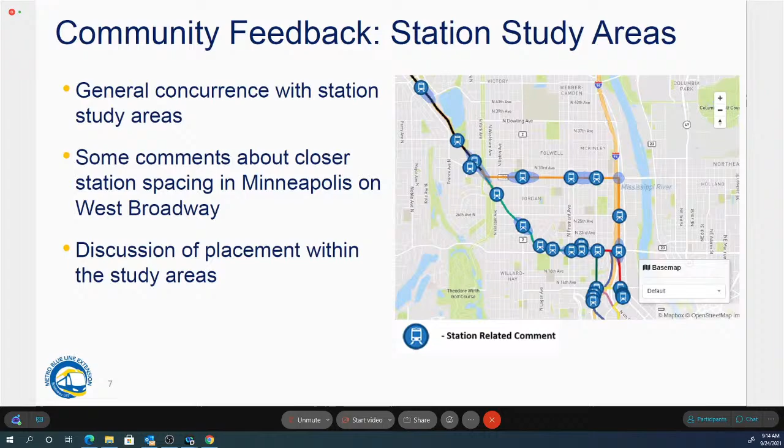Regarding the visualizations, it's a little bit different in each community. For our Brooklyn Park folks, their visualizations have been around for quite some time, so it was just kind of going back.

Why did you make some of these decisions? How did this park and ride get placed here and not another place? How did you come up with this site design? Let's walk through it and really get into those details.

And a lot of the other places like Crystal, we heard a lot about pedestrian connections and safety. That's something we've been talking about for a long time, and the designers are definitely keyed into that as we move forward in the process.

In Robbinsdale, pedestrian safety, a lot of questions about traffic flow and how the LRT and the road work together. You see the visualizations of how that could look. Community cohesion, connections into downtown. And again, we heard it from almost day one when we started at Project 2.0, but just the connection to North Memorial Hospital, the importance of that, and potentially park and ride options.

For Minneapolis, the visualizations, I would say, spurred even more questions to get into details. So how do the turn lanes work? How do you place these stations? How does it all really fit together?

For Lowry, there's bike accommodations. So how would that, kind of what we're showing, how does that really work? Let's get into those details. Pedestrian crossings, especially maybe at unsignalized intersections, and how that would work.

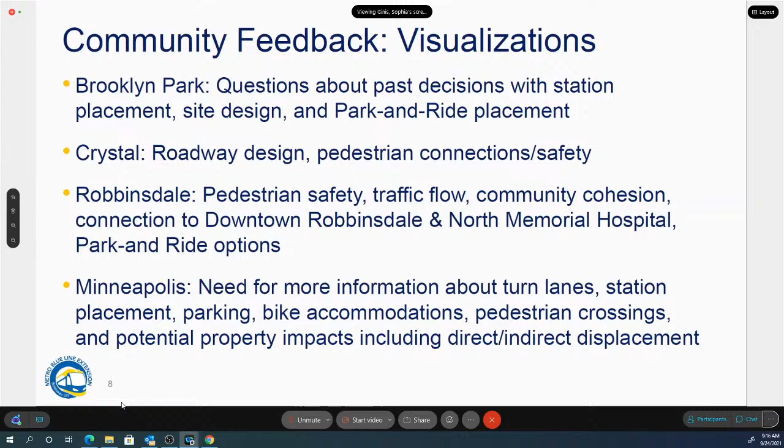So that's a small summary of what we've heard. There's obviously a lot more detail within that, but at least that hopefully gives you a flavor of some of the themes and reactions that we've received.

Well, thanks so much, Sophia. 2,000 conversations, you've been really getting a lot of feedback, and I know it's really important that we have full consideration of residents, businesses. This is quite a puzzle that you have been hearing about.

Any questions for Sophia? What we've heard. Yeah, I have a question. This is Nicole Bueller from the Blue Line Coalition.

Sure, go ahead, Nicole. So I guess maybe it's more of a comment, but I would just add that a lot of what we've been hearing, and I'm a member of the community engagement cohort, and what I've been hearing there is that when people are out, having these conversations about route selection, Lowry or West Broadway for example, it's really difficult for community members to make that decision without knowing what the impacts would be potentially for displacement, either direct or indirect, on either Lowry or West Broadway. So without having that information in front of them, it's difficult for them to say, okay, we'd prefer West Broadway or we'd prefer Lowry. So I guess there's my comment.

My question is, is there going to be an attempt to be able to show that to the community before expecting folks to select a route? Chair, would you like me to answer?

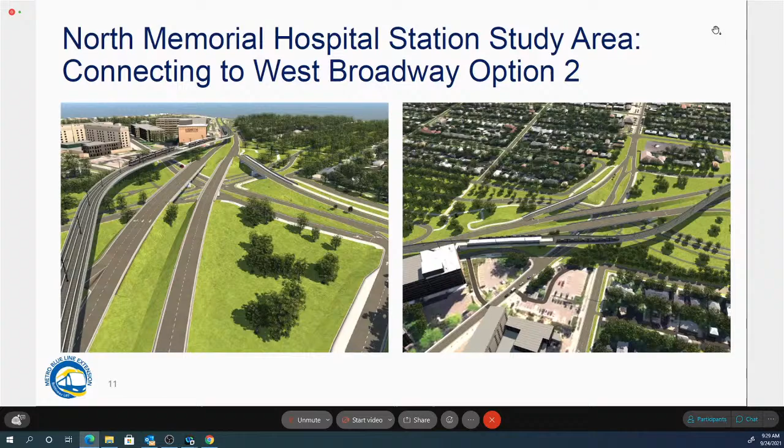We're going to move on to the next one, and this is a connection from Lowry and how a connection from Lowry would work.

So this is coming on the left-hand side. This is Lowry, looking east. This is Lowry coming westbound on a structure, and we start coming up over in grade and connect back to

a center running configuration on 81. As you look at the left-hand side, that gives us more of that north-looking view again as we're looking up West Broadway. You can see how a bridge structure comes up from Lowry, sweeps around into a center running configuration on County Road 81 and connects to North Memorial Hospital.

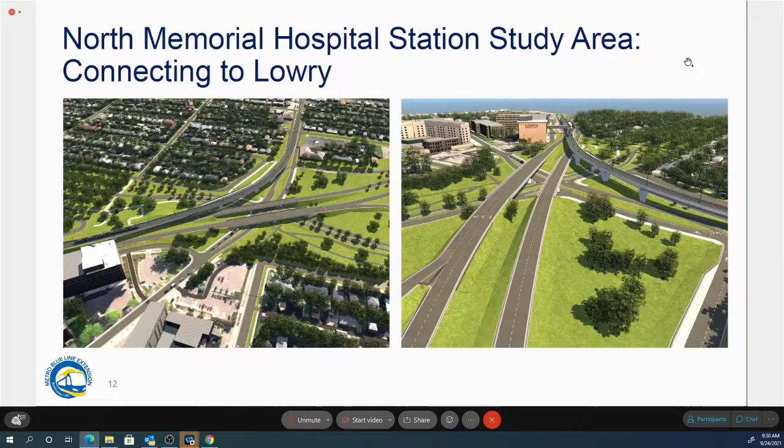So I'm going to move forward here. We're going to look at a couple of videos that we have. So go back.

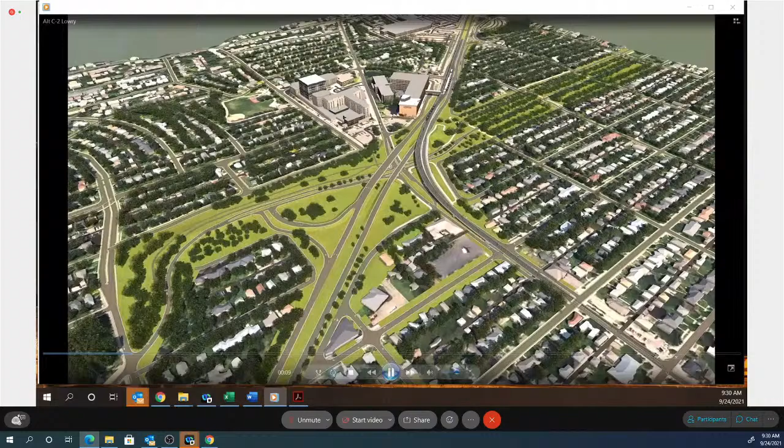So we'll look at this first video here, and this is the Lowry configuration, and it'll give us a 360 of how it looks. So we're starting off up above, looking to the north, and we'll swing around through this and see how it works.

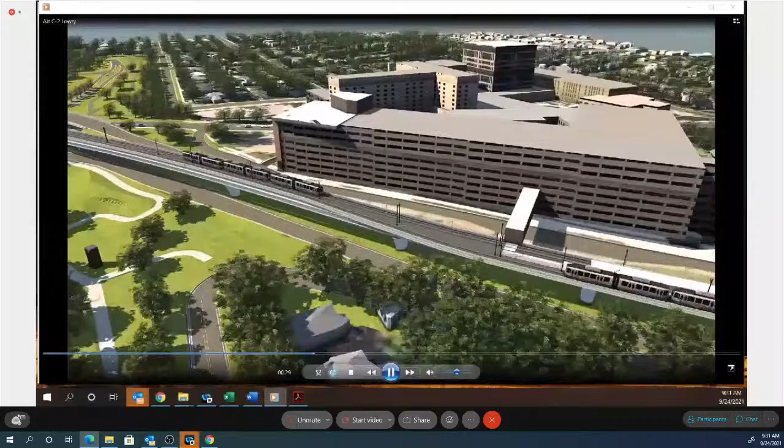So coming up from a center running at grade on Lowry, building up to a structure that kind of mirrors the ramp from Lowry onto County Road 81. You can see how the train fits here, where a station would be located. The station, again, because of the grades, pushes more towards that Abbott Avenue area, having a connection to Abbott Avenue and a potential connection to the hospital parking lot, parking ramp.

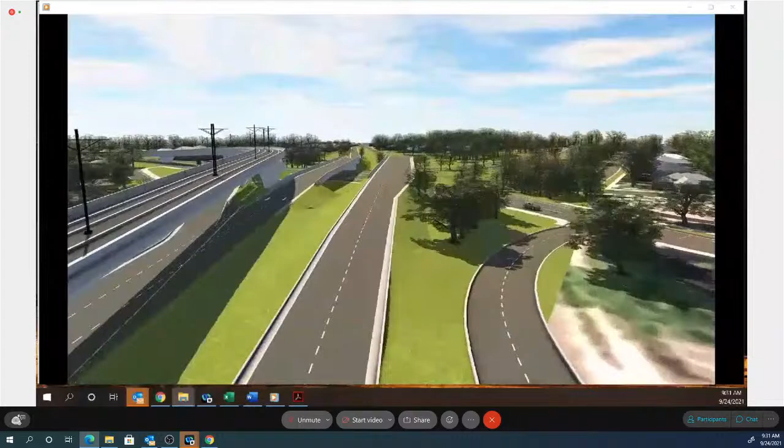And these videos are really, they look fairly detailed, but they are based on a very minimal amount of engineering. We're probably less than 5% engineering right now. So if you start looking too closely there's a lot of details that are maybe not shown, but this is more of an idea of how things can fit and what the massing is of it and how it would work.

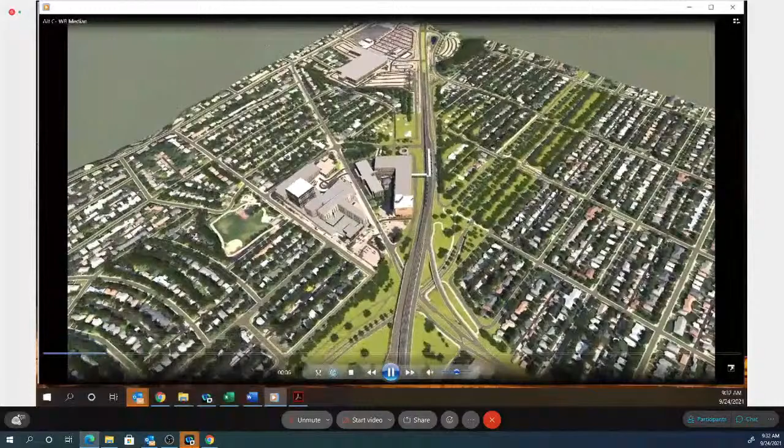So the next video that we're bringing up here is that first option of West Broadway going north onto County Road 81. This stays center running here and goes between the two bridges that are under construction for County Road 81, or the West Broadway over Lowry.

So again, this is one of those locations where the height of that bridge and needing to have a flat space for a station, as we're trying to catch grades, it really pushes the station back down towards Abbott Avenue. So that's why we're showing it in this location. We're trying to get an area that's a tangent, meaning straight, so we can get a station in there, and fairly flat for that station, so we're not on a slope.

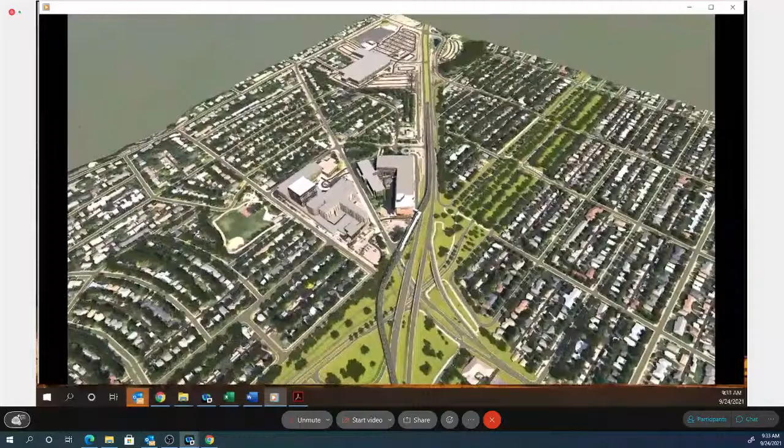And then after this, we'll have one more video of option 2 for coming from West Broadway. This is more of a swoop where we go again over that southbound lane and get maybe a bit closer connection to the hospital, but it allows us to move that station a little bit more to the south configuration, so there's a better connection maybe to the trails, the park board, Oakdale, and the neighborhoods around it, and has a connection to that hospital a little bit farther to the south in their campus, and may have a potential for a better connection to both sides of their campus.

So these are the three videos and the concepts. Chair, if there are any questions on this, if not, we can move on to look at Crystal and some of the work we're doing there. Any questions at this point?

And Nick, great visuals. I fortunately am pretty good at not getting sick when I fly in an airplane, but that gives you that real kind of movement there.

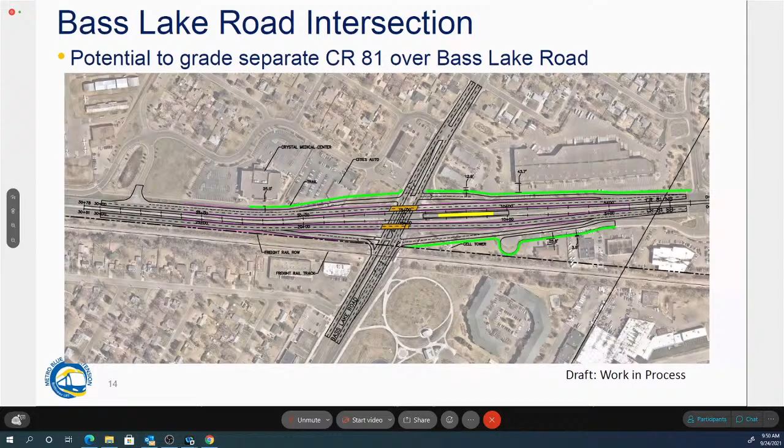This is an option we're evaluating and will continue to work on. It really solves quite a few issues, and we need to keep that station open, safe, and inviting, while limiting the footprint impacts of an overpass. We can probably move to the next slide, Sophia.

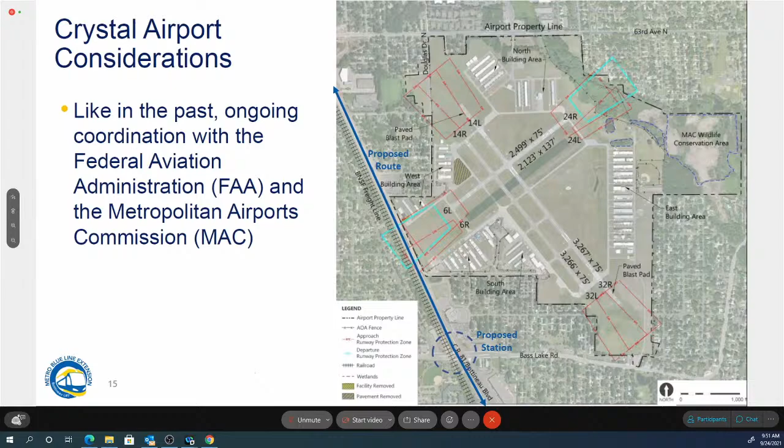Next slide is Crystal Airport. With Bridget here, she knows we've had a few meetings with MAC and the FAA to discuss this area and moving the light rail from the configuration we had before - which was in the freight rail corridor - over about 95 to 100 feet closer to the Crystal Airport, at grade center running in the middle of the highway, evaluating impacts and how we can move forward to get the appropriate permits and permissions needed to build light rail in this area.

We've done some additional work in this area, including additional survey to verify the approach surfaces for the airport that we need to consider and evaluate, and how light rail would fit within there.

So we're working on those permits with the FAA. MAC is helping us partner on this so we can move forward and make sure that this is not an issue we can't overcome.

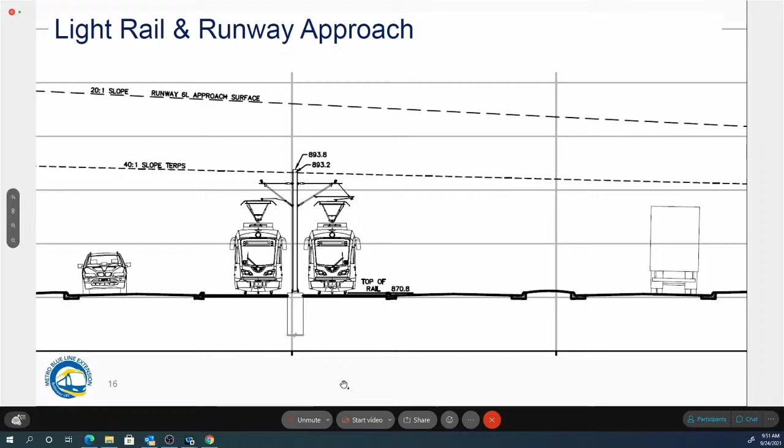With that, Chair, that covers our Robbinsdale and Crystal updates. We have a Crystal open house next week where we'll share a lot of the information we've worked on with Crystal, and then we're working on having a Robbinsdale open house in October to meet with the community also.

That's helpful, thanks Nick. Any questions on Crystal? All right, seeing none, we're moving on.

This is Mayor Adams. I'd like to make a few comments. Thank you, Nick, for coming out and bringing the other staff with you. We had a great conversation last night. The number one thing that stuck out with us was the safety issue of where the station would land.

It's kind of tucked down in between, and depending on how it's done, whether with pylons or retaining wall type things for getting the incline for that bridge to go over Bass Lake Road, I think we have some challenges there. The second thing that struck me was the amount of different properties that would end up being taken, so we certainly have some displacement issues in that location as well.

One of the things we also brought up after a whole lot of discussion was kind of a bigger picture view of changing this station to this design. In looking at the traffic studies, we see something very similar to what we have in terms of traffic flow. I thought it important to highlight at the end of our conversation that we don't necessarily want the same.

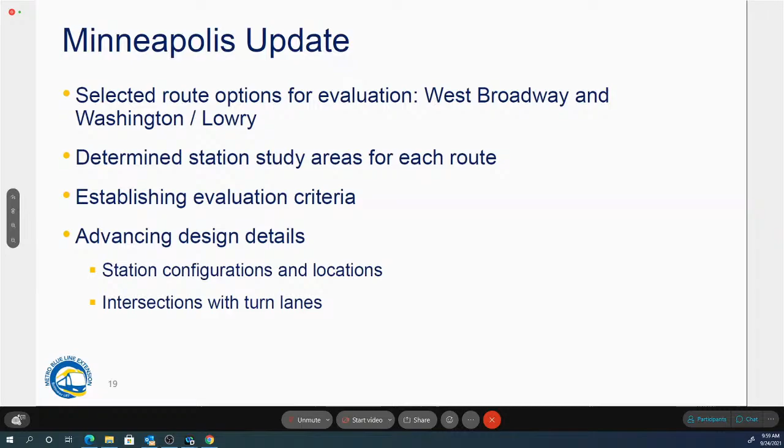Now comes the tough part. How do we decide between those two routes? First of all, are they both feasible in order to build an LRT line on and to continue to advance forward? And assuming that both alignment options are feasible, which one better serves the needs of the community, the goals of moving people, the goals of providing equitable work and such.

So there really are two pieces that we want to work on over the balance of this year. The first is to start to analyze evaluation criteria that we're now establishing, and the second is to look at more detailed analysis of impacts of both of these alignments based on turn lanes and station placements that are out there.

We're in the process of producing numerous maps and tables and charts and guidelines that will help put together evaluation criteria that we can utilize and discuss with the community about how to look at each of these two routes.

We also list some of the others as well. So which of these alignments better serve to help provide equity into the community, to help serve households of various economic income values, help provide improvements in areas that were previously disinvested in. Those kinds of criteria will be ones that we'll want to evaluate.

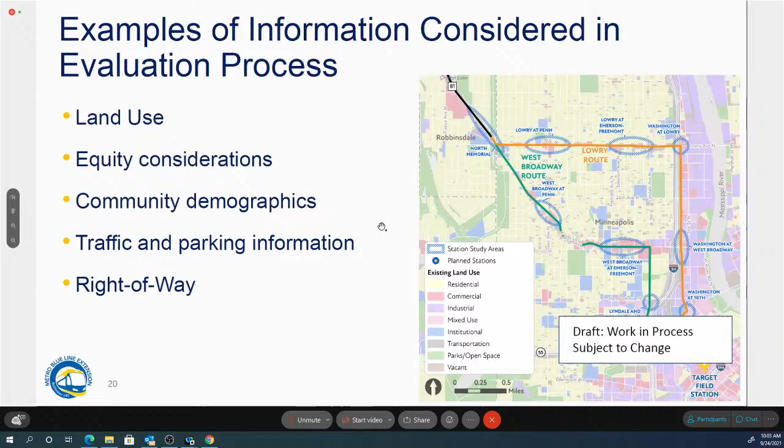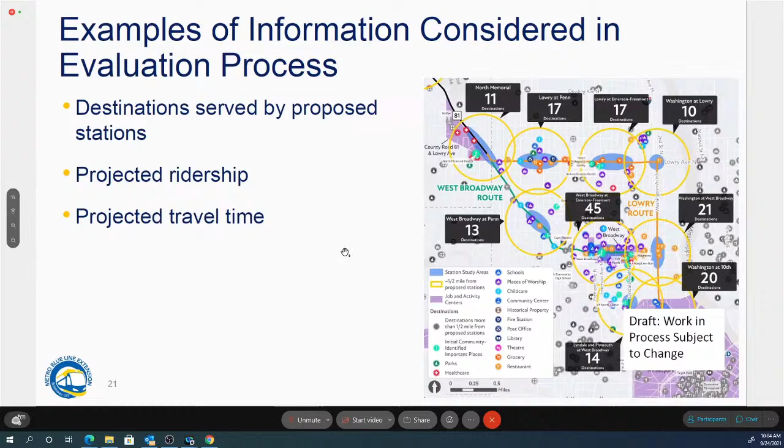We'll also want to consider some quantitative factors, like which of these two routes we're projecting to provide more ridership, a key factor in building a transit line. Which route impacts travel time, which also impacts ridership. They're very close in terms of length, but those are just samples of the evaluation criteria we're pulling together as a project office to bring to the public at our workshops and upcoming networking sessions to gather feedback on the comparison.

While evaluating on those terms is one piece, it's also important to understand what each section along here looks like. We're working with city staff providing options and opportunities that show greater detail. What we've shown to date is how LRT can fit along these routes. Now we need to take it a step further.

Here's what happens when we include turn lanes necessary at signalized intersections, when we put in various different station configurations at specific spots. When we add those elements in, what are the right-of-way impacts and how does it affect the adjacent communities?

We've broken the two route options into seven sections. Section 1 is how we get from Target Field to the Lyndale Plymouth area on the West Broadway option. Section 2 is Lyndale from Plymouth up to West Broadway. Section 3 is a very tight section dealing with West Broadway from Lyndale over to Irving, and then how we do LRT on West Broadway from Irving up to the Robbinsdale border, including what would be a station at Penn.

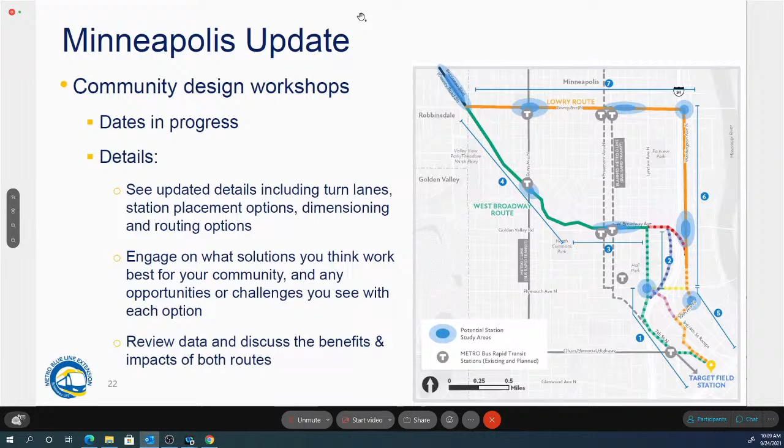All right, well, stay tuned. I know that this is something that we know is so complicated, and yet we want to be transparent every step of the way to get these alignment decisions in the community-supported alignment, in the best way possible. These are generational decisions, and knowing the impacts, both positive and negative, how we look toward the future is really incumbent on us being thoughtful, careful, and thorough.

And which really leads us to the schedule. Sam, you're going to take us through how we're going to process the technical information and yet work through to meet these various milestones. So, Sam?

Thank you, Chair, and good morning, Council members. My name is Sam O'Connell, serving as the project lead on the Met Council side.

So as Dan and Nick kind of really took you through, literally at feet, and in our workshops, we're going to be at inches in some of our discussions. My role today is just to pull back a little bit, get back up into the elevation here and take a look at this broader project schedule.

As Nick and Dan and Sophia have shared with you, a lot of the good work both on the community engagement side as well as our technical work with all of our communities moving forward, we really see the marriage of both of those pieces coming together with our fall community workshops. So very much what Dan explained, coming up for some communities in late October, for other communities in that early to mid-November.